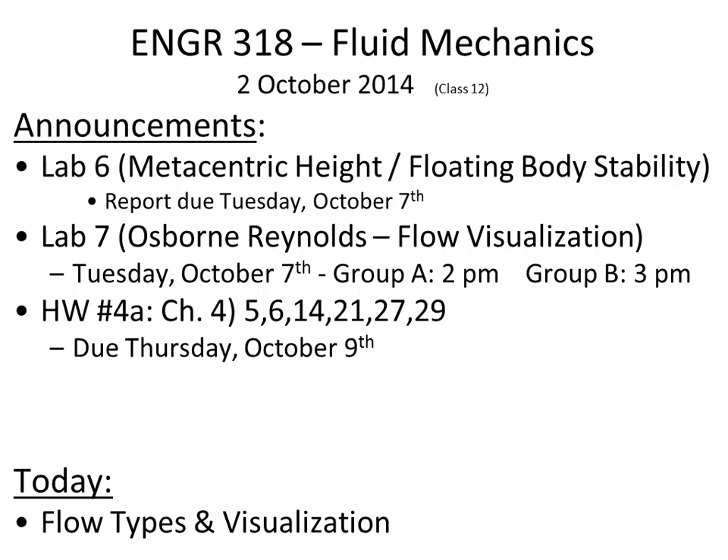So we're talking about Chapter 4 stuff, and this is big news because previously we've only been doing fluid properties and hydrostatics. Finally, we get to start talking about the fluids moving. And so why does fluid motion matter? Why are we excited to start thinking about particles moving in the fluid? Yeah, it's the real deal of civil engineering.

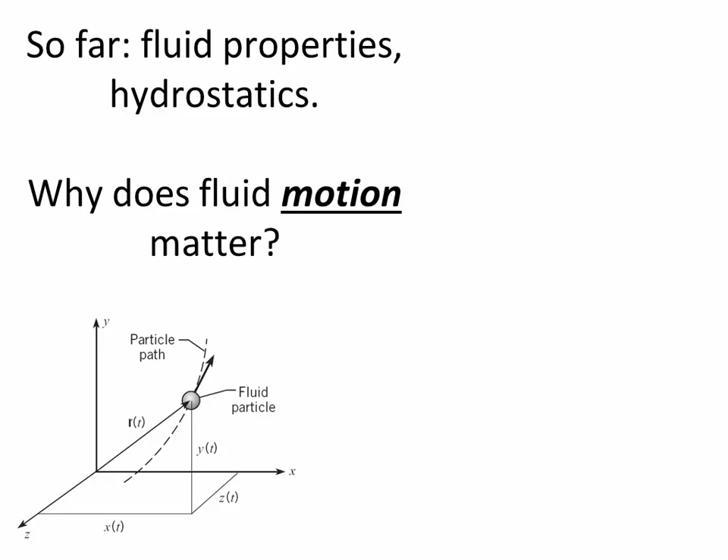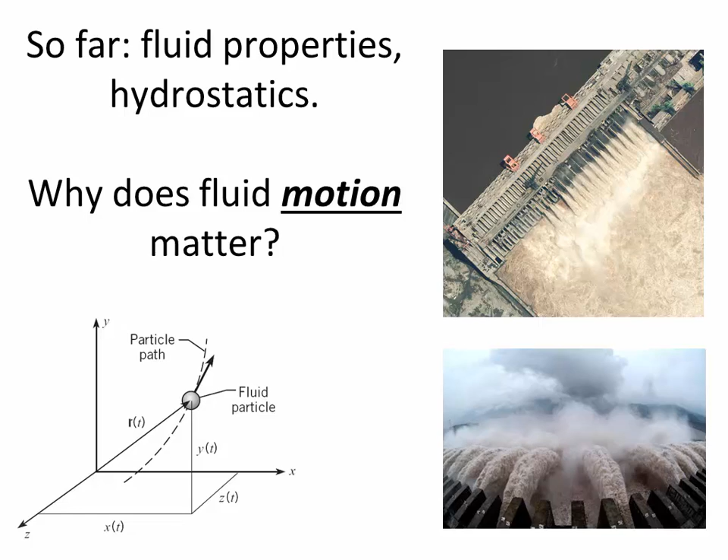In civil engineering, sometimes we have static fluids, and so the water on the left side of this dam can be approximated as static, but what happens inside the dam, the forces of the fluid as they move through a turbine, the amount of energy that's exerted on the bottom of the stream channel as those jets of water impact the channel. The majority of the water out there is moving somewhere, whether it's in the subsurface or over the surface.

So there are two different approaches for trying to break fluid motion up into pieces and try and understand what's the velocity of the fluid, trying to track where it's going over time. The Lagrangian approach answers the question of what is the fluid velocity by using a frame of reference that tracks individual particles. So it has a certain field of analysis. We're looking at the particles that are in this box. And the Lagrangian approach says, let's look at each individual particle.

It looks at each particle, and it tracks that individual particle over time. The path that's traced by each particle is called a path line. We're also going to talk about streak lines and streamlines today, and we'll have an activity for drawing path lines. But the Lagrangian approach has a limitation: it's really hard to keep track of all the particles in a flow field because there's going to be a lot of them. If you're going to do it at the molecular level, it's hard to track every particle.

And so instead of following every particle, what you'll sometimes do when employing the Lagrangian approach is use this particle to represent the particles that are around it. So this one is going to sort of be the approximation. It's a little bit like a poll ahead of an election. One person approximates the behavior of lots of others.

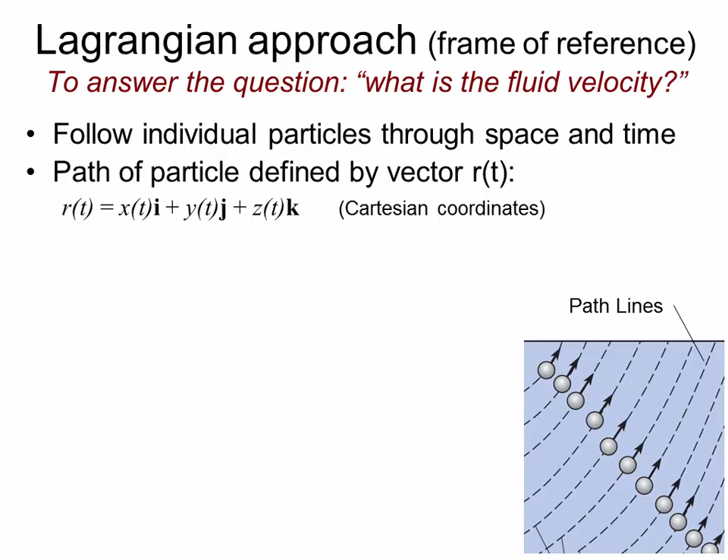And so this one particle is used to approximate those in the surrounding areas. So in the Lagrangian approach, the coordinates, the location of each particle is tracked over time. And so in this approach, the velocity of a particle over time is going to be broken up into its x, y, and z components.

And so when we're talking in 3 dimensions, we don't have to just think about the vertical and the horizontal, but now also there's a 3rd dimension into the page. And so we can have an i, j, and k, and each of those are 3-dimensional coordinates where we have a velocity in the x, y, and z. So u, v, and w, we're just talking about the magnitude of the velocity along a certain axis over time.

So there's the Lagrangian approach, and the other approach to determining how the fluid is moving is the Eulerian approach. And instead of tracking individual particles, the Eulerian approach says, let's break our field of area, this big box, into smaller pieces. And then what we'll do with this mesh of pieces is we will say that the velocity inside of this window is a certain direction. And so we'll assign every particle inside of this window a certain velocity at a certain time.

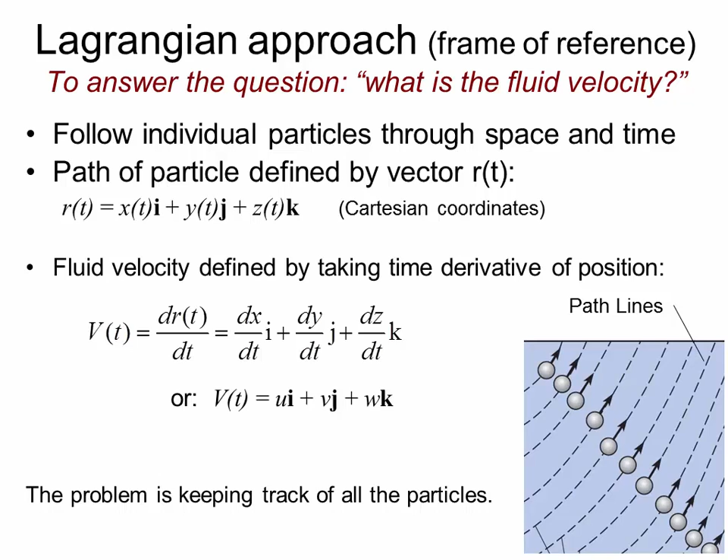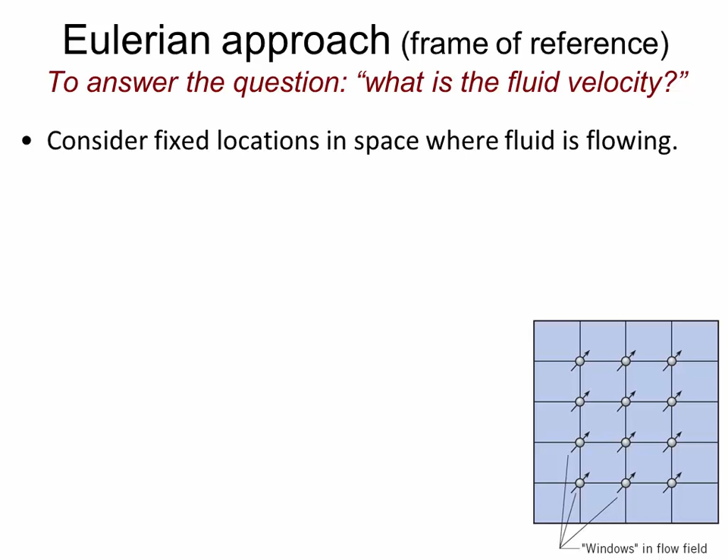And so it's not tracking a particle that's moving over time, because in this first approach, inside of our window, the particle is moving in the window. In the Eulerian approach, our window is stationary, but what we're doing over time is we're assigning behavior to the stationary window. And so we're going to be saying, what is the velocity in 3 dimensions? What's the x, y, and z velocity of this at a certain time? So at time t, each window has a velocity in 3 dimensions.

And so we'll look at different ways of applying both of these methods. But the important thing is to note that you can't track every particle, and so there have to be simplifications in order to approximate the behavior of the entire flow field.

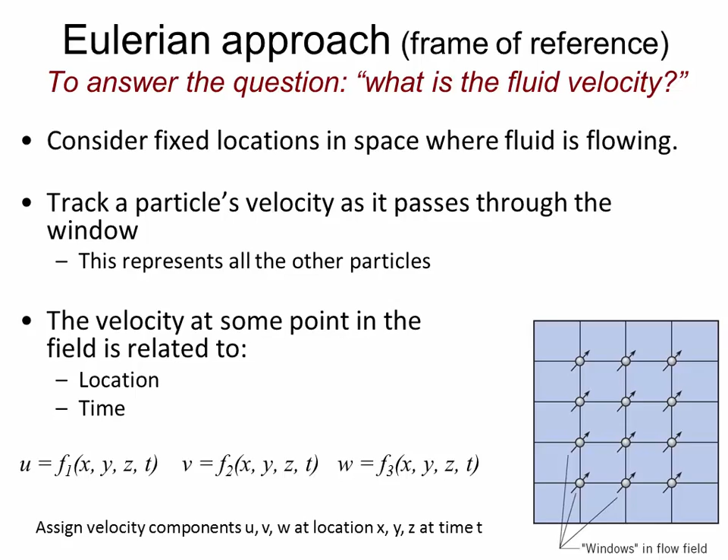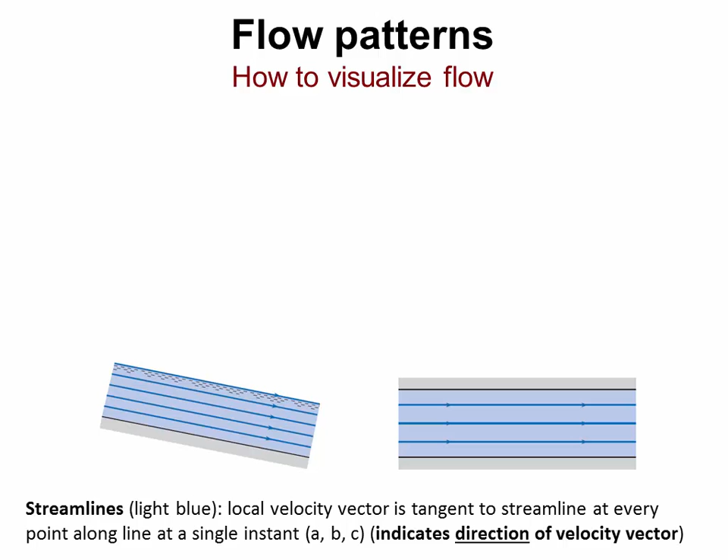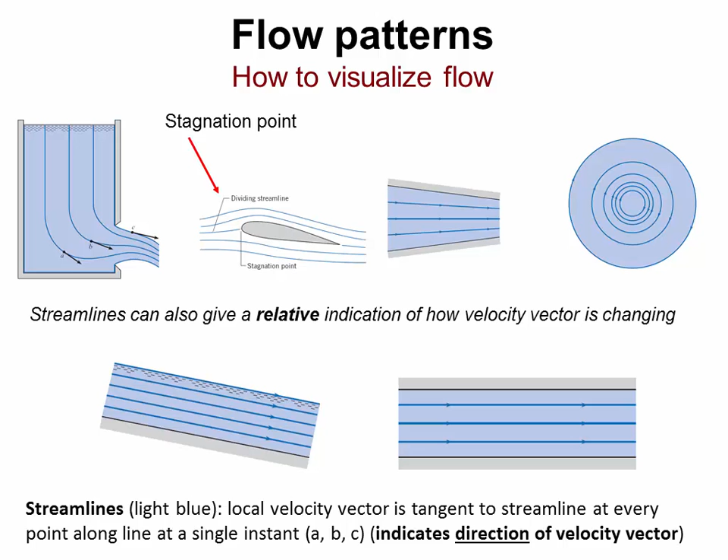And then on the far right figure here, it's showing rotational flow. Again, it's non-uniform because the direction of the velocity keeps changing. Even if the magnitude or the speed is the same, as the water flows around in a circle like a vortex, whether it's a hurricane or like a sinkhole that's draining water, if it swirls around in circles, the direction of the velocity changes, and so that is the definition of non-uniform flow.

So here we're talking about non-uniform and uniform flow. The definition of uniform flow is when the velocity is constant in the direction of the streamline. That means with respect to position, the velocity isn't changing. The velocity is the same on the left side of the flow field as it is on the right side of the flow field. As the flow moves in the direction of flow, it's not speeding up, slowing down, or changing direction. Everything's uniform in an open channel and a closed channel.

The change in velocity with respect to position, here S is referring to position. So the change in velocity with respect to changing position, dV/ds, is 0. There's no change in velocity as the position varies. Now, non-uniform flow is when the velocity is changing. And here are those diagrams showing non-uniform flow. Here the velocity is increasing as we go in the direction of flow. So dV/ds is not 0. In fact, in this case, it's going up. Here it is just the direction component of the velocity that varies rather than the magnitude.

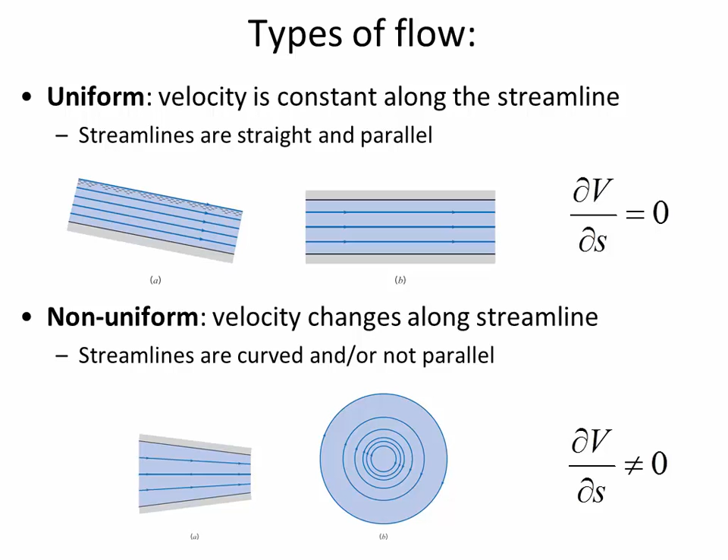So the first of many different ways we classify flow is uniform or non-uniform, velocity as a function of position. The next way that we're going to divide flow up when we try and classify it is into how the flow changes over time, not necessarily position. Uniform, non-uniform is all about position. Steady, unsteady is about how flow conditions change over time.

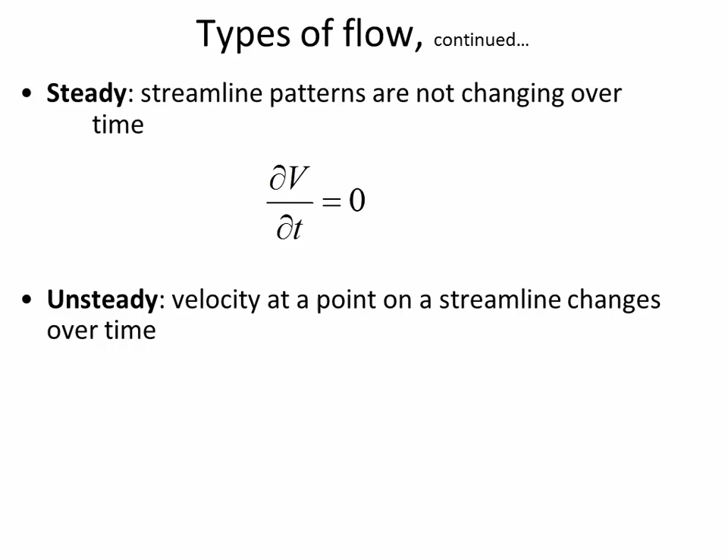I see flow right now. What is the flow going to be like in 5 minutes? Is it going to be the same as it is now for the location that I'm looking at? Or is the flow in 5 minutes going to be different? And if it's constant over time, if there's no change over time, we call that steady flow. And if it is varying over time, we call it unsteady flow.

Now, I don't have any pictures shown on the screen right now. I had pictures to show you when it was uniform versus non-uniform. How come I can't show you a single image that differentiates between steady and unsteady? Because a picture is just at a single instant in time, and the whole essence of steady versus unsteady flow is what's happening over a period, from one time to the next. And so a single image doesn't give us any information about whether flow is steady or unsteady.

And so we have to use a video or a sequence of images in order to illustrate the difference between steady and unsteady flow. And I've got a video to show you that illustrates what unsteady flow looks like.

Really excellent illustration of what to look for. That's crazy. It hasn't even been raining. The conditions at one time are not equal to the conditions at another. That is so deep. It's also a good illustration. It seems like it's not raining there. It's raining somewhere. I hope those people have enough sense to get out of the way.

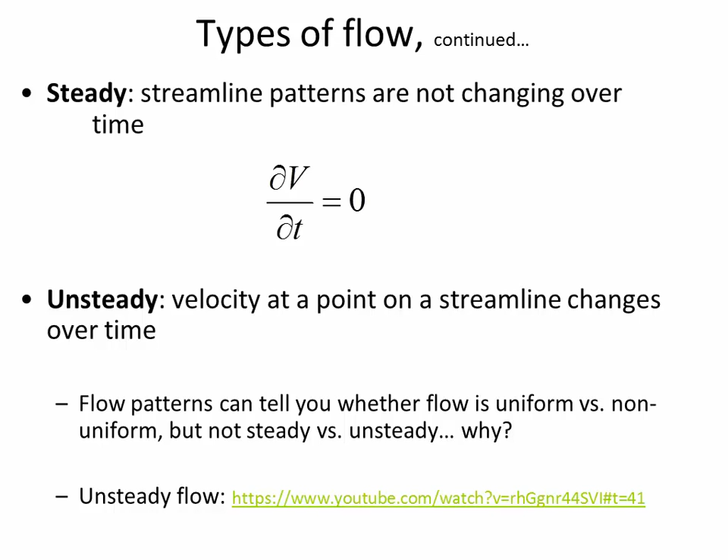So flow can be uniform versus non-uniform, steady versus unsteady. Those are talking about two separate different things: flow as a function of position and flow as a function of time. Other ways to classify flow is by laminar versus turbulent.

And laminar flow is a very smooth, slow-moving water, and the way that we calculate the Reynolds number, which classifies whether flow is laminar: if the Reynolds number is less than 2,000, then we know the flow is laminar. That is a function of the density of the fluid, the velocity at which it moves. If it's inside of an enclosed pipe, then we would account for the diameter of the pipe, and then finally all of that is divided by the viscosity of the fluid.

Reynolds number is a unitless property, so all of these three things in the numerator multiplied together will have the same units of newton seconds per meter squared that viscosity has. And so when we divide the numerator and the denominator, there's no units remaining. So laminar flow is very smooth, and it's characteristic of very little energy being lost when conditions are laminar. And the flow doesn't spread out as much.

Remember the diffusion that we saw in the first image of the smoke going over the top of the car? Those smoke streamlines will spread out less in laminar flow than they will in turbulent flow. Next Tuesday, we're actually going to have a chance to visually see laminar versus turbulent flow in the lab.

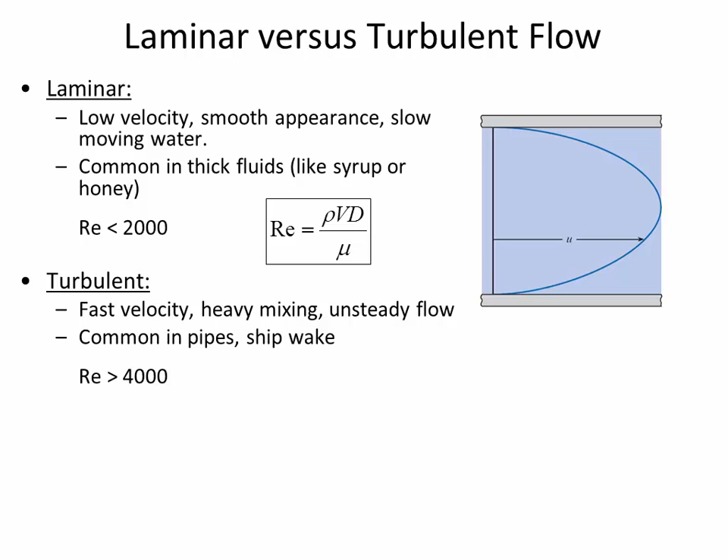Now, turbulent flow is when this property called the Reynolds number is greater than 4,000. And it's typical for water moving at a high velocity through a pipe network, or a ship wake or the wind that comes behind a truck on the road. It's like lots of turbulence, and so a Reynolds number of greater than 4,000, but then there's this transition range in between, where between 2,000 and 4,000 we don't know exactly whether it will be laminar or turbulent.

It could be one or the other depending on what direction you're coming from. And by that I mean if you had a pipe and the water is moving through it very slowly, if conditions are laminar to begin with, and you're gradually increasing the flow velocity just a little bit, then in this uncertain intermediate range between 2,000 and 4,000, it will stay laminar for a long time until there's some disturbance that will then force it into the turbulent regime. So if you bang on the pipe with a hammer, then suddenly it might transition into turbulent flow.

Likewise, if the water velocity is very high moving through the pipe and you're gradually decreasing the velocity so that the Reynolds number is going down and down, it will stay turbulent until it reaches about 2,000, and then it switches into the laminar range. So we have an example here. I'd like you to get a crack at this unitless property of Reynolds number.

We have a pipe that's 2.5 meters in diameter, and the velocity moving through the pipe is 0.1 meters per second. What is the Reynolds number under those circumstances? And then part B is asking what's the maximum flow velocity that you can have and still the Reynolds number will be equal to 2,000. Or in other words, that you can guarantee the flow will be laminar.

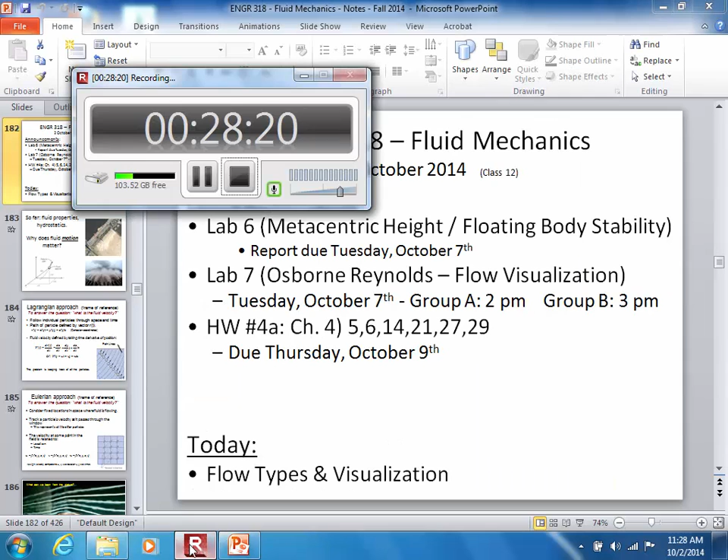It'll be laminar. Yeah, I should change that to Reynolds number is less than or equal to 2,000. But they call it transition. The flow will be laminar or turbulent, but the zone between 2,000 and 4,000 is indeterminate. It depends on the flow conditions prior to what you're seeing. How did it get to 3,000? Did it get there because it was fast and now it's slow, or did it get there because it was really slow and now it's relatively slow?

So I did it as the velocity times the diameter divided by the kinematic viscosity. So it was 0.1 meters per second, 2.5 meters, the diameter of the pipe, and then 1 times 10 to the minus sixth meters squared per second. So even though it's moving really slow, 0.1 meters per second is pretty slow moving water, it's still considered turbulent flow.

So when we're in the lab next Tuesday, we're going to be looking at water flowing through a little pipe, a tube. And we're going to inject a dye into the center of that pipe so that we can watch the dye and see if it gets scrambled or if it stays in a straight line. And it's going to have to be moving super slow to not get scrambled up, because here 0.1 meter per second is hardly moving at all, and it's still turbulent.

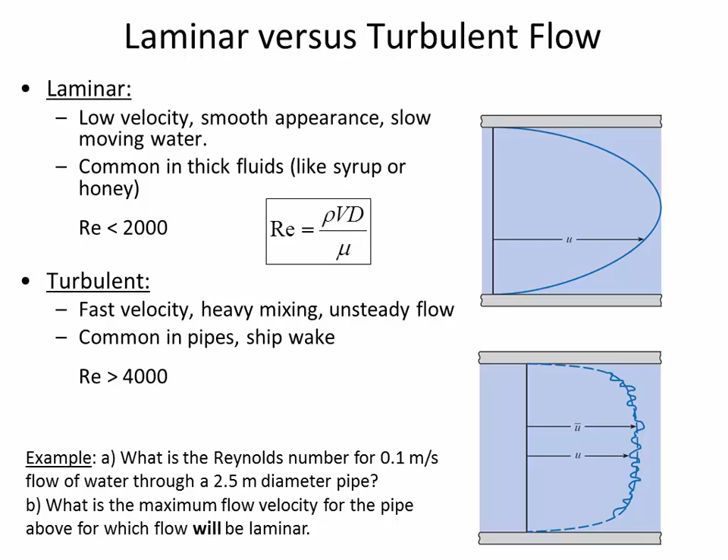So what we've talked about so far is uniform versus non-uniform, steady versus unsteady, and laminar versus turbulent. So we're breaking the flow up into lots of different flow types to be able to describe what's happening to it and how that affects the forces that we see and the behavior of the fluid. Here is a comparison. There's uniform versus non-uniform, steady versus unsteady. So what is it talking about? When we're trying to classify whether flow is uniform or non-uniform, the key thing here is position. Change in velocity with respect to position. Whereas in the classification of steady versus unsteady, it's change in velocity with respect to time.

Now this slide that I'm showing you right now is pretty empty. Later on, through the rest of Chapter 4, I'm going to fill up this slide because we're going to have certain equations that deal with uniform flow versus non-uniform flow, some kind of equations that deal with steady versus unsteady, and we'll be able to actually break up all of these coming concepts into the main questions that they resolve: how does the velocity or the pressure change because of some force that's being applied to the fluid. And so this is the reason why there's so much dead white space down here, is that you'll see this same slide but with more information in future lectures as we flesh out all these concepts that are related.

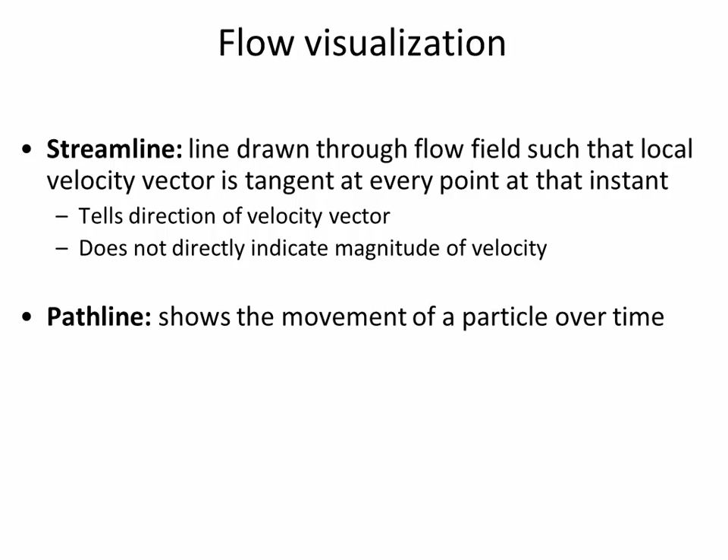So that first picture that we saw of the fancy car in the wind tunnel, that was an illustration of flow visualization, and streamlines are a way of observing not the absolute magnitude of the velocity but the relative velocity, and it tells us the direction of the velocity vector but not the magnitude. A path line, remember when we were looking at the Lagrangian approach to identifying the velocity, the Lagrangian approach was look at a single particle and follow where it goes. And that's what a path line is: it shows the movement of a particle over time.

A streak line is similar but a little bit more complicated. What a streak line is: if you started injecting dye into a fluid or some sort of a tracer, and then the fluid is moving around, then the location of that tracer or dye tells you the history of where the flow was. And let me illustrate that with just a little drawing I'm going to put on the board here of a river, and let's just for sake of argument say it's the Ohio River, and then there's the bridge that goes over the river. Okay, so here's the river and then here's the bridge.

The water's moving this way. Okay. If I'm walking across the bridge and I throw in a, well, let's not make it too gruesome. If I throw in a can, I was going to throw in a body, but all right. So I throw in a can, then the can just floats down the river, and the path line, you know, if the water's just moving straight like this, then the path line, here's the can right now, here's the can in 1 minute, here's the can in 2 minutes, here's the can in 3 minutes.

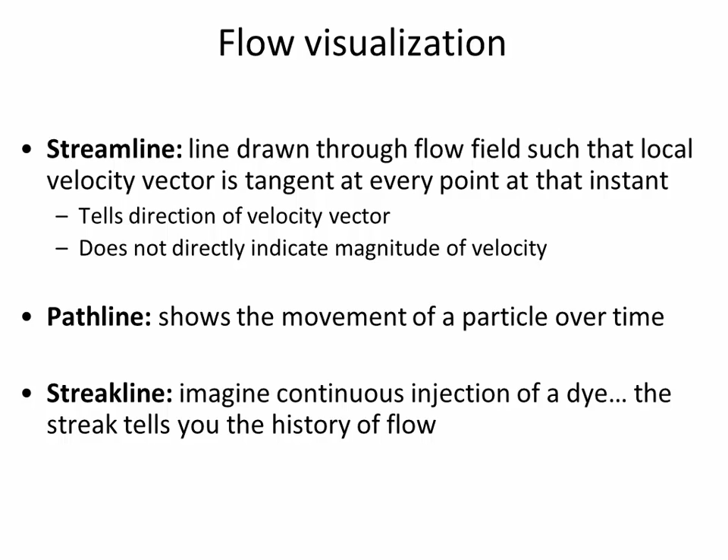It's showing the streak of not only the movement of the fluid, but it's also showing my movement, because the fluid is just moving to the side. The reason why this is at an angle is because I was waddling across the bridge as I carried that big bucket of paint that I was pouring in. All right? So streamlines, path lines, streak lines, all three of these are used to help us visualize flow.

So here's an illustration that's in the textbook that tries to show you streak lines, streamlines, and path lines. And before I show you this illustration from the book, I have to just lay the groundwork, because the picture, when you look at it, there's so much stuff drawn on top of itself that you can't really interpret it unless you spend a lot of time staring at it. So here's the scenario that's going to be illustrated in the following figure.

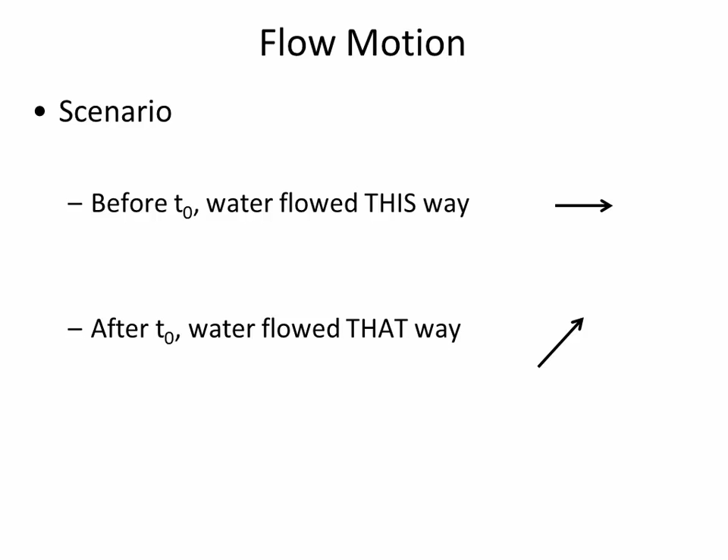Before some certain time that we're going to call T0, that's like the dividing point. There's before T0 and then there's after T0. It is the event that divides time. Before that, the flow was going to the right, and then after that, the flow was going at an angle. So there's only two periods. There's before and after, and the flow is going two different directions during those periods. And so here's the illustration.

Here it's showing these blue lines, the ones that are horizontal, that are pointing to the side, are the streamlines for before T0. So T is less than T0. That means it's the streamline before this dividing event. And then after T0, the streamlines are going at the angle.

Okay, so these two figures here are showing path lines. And so here is a tracer of some sort. It's a single object that's been dropped into the fluid. It's a can, whatever. It's floating, and it floated to the right, and then when the flow changed directions, now the can is traveling at that angle.

And so path lines are easy to draw. But what's a little bit more tricky to draw is the streak lines. And sometimes we get tempted into thinking, well, streak lines are just the inverse of a path line or something like that. But that's not true at all.

It's just coincidental in this figure that it looks like a mirror image of some sort. I'll give you a handout in a minute that disproves that idea. But what a streak line is, remember when I was walking across the river and pouring in the paint, in the streak line, we're pouring in our tracer at the same location through the entire two time periods. And this is the first drop of paint that we poured in. It's been pushed all the way over here.

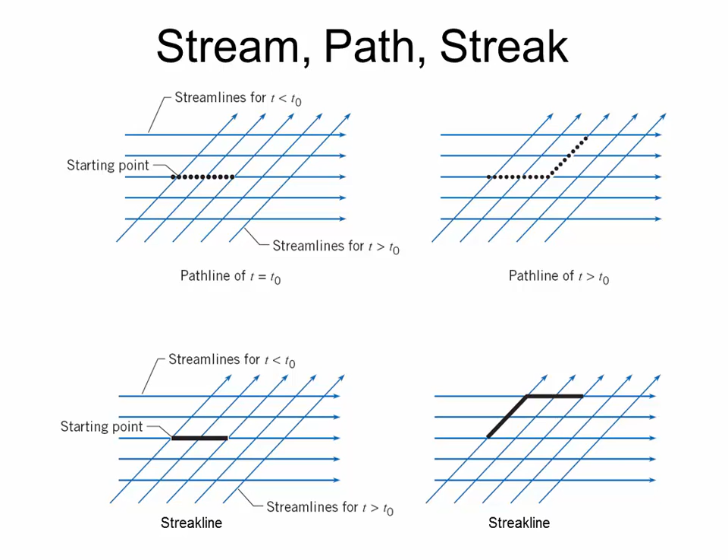Here's the paint from the beginning, and here is where I'm still pouring in the paint at the very end. So you can see the shape that it made by the changing direction of the flow. So here's an example. Let me hand it out now so you can get practice drawing these. Use pencil. Don't start with pen. Don't get too confident because these are tricky, especially the streak line.

Now, I don't need to collect these. I know I collect a lot of the in-class exercises, but this one is just for you. It's not for me. But I still would encourage you to work with a partner on attempting this. So there's 3 different time periods in this one. Oh no, wait, this is a separate example. Okay, we'll do this handout in a minute. Let me show you the one that's on the screen here, and then you can go to the handout.

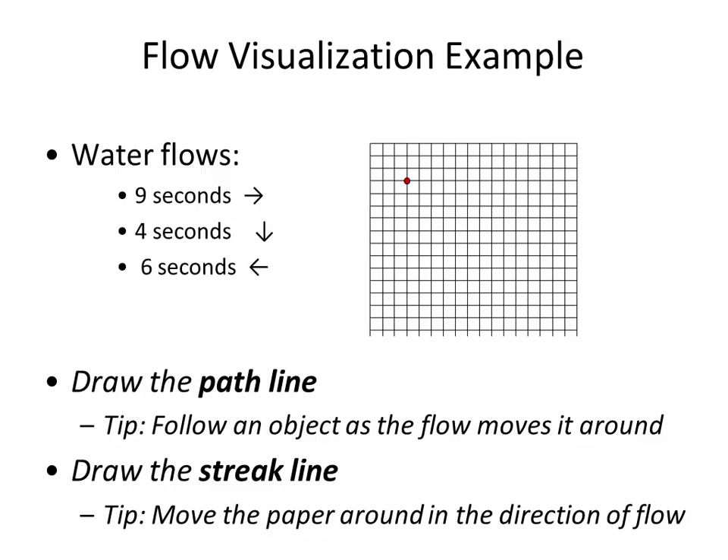Right, right. So when it's going at an angle, the block path is longer than it would be if it's just one of the top or the side lengths. Okay, so I'll stop talking, let you collaborate, and do your best to draw the path line and the streak line for that example in the handout.

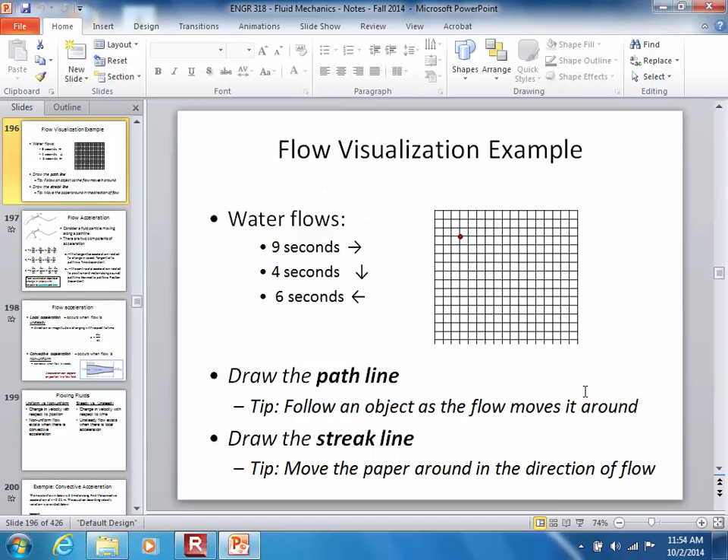We've been talking about velocity. And no discussion of velocity is complete without a discussion of acceleration. It's where velocity comes from, if you think about it. Fluid velocity from acceleration, there's different types of acceleration that we're going to be talking about this semester. The type of acceleration that most people think of when they are coming from a background of physics is usually something that we call local acceleration.

But velocity can change as a function of time, or it can change as a function of position. And so you think about the particle that's moving along some curved path. And the two components of acceleration here are the acceleration that's tangential to its direction and normal to its current direction.

The tangential acceleration is related to a change in speed, or the change in magnitude of its velocity. And if we have a change in its direction, then that's a centripetal acceleration that's normal to the path line. So if you're in a car and you're driving around in circles, you're going to feel an acceleration even if the speed stays the same. If you're still going 30 miles an hour as you drive in a circle, you're pushed to the side of your vehicle because of centripetal acceleration.

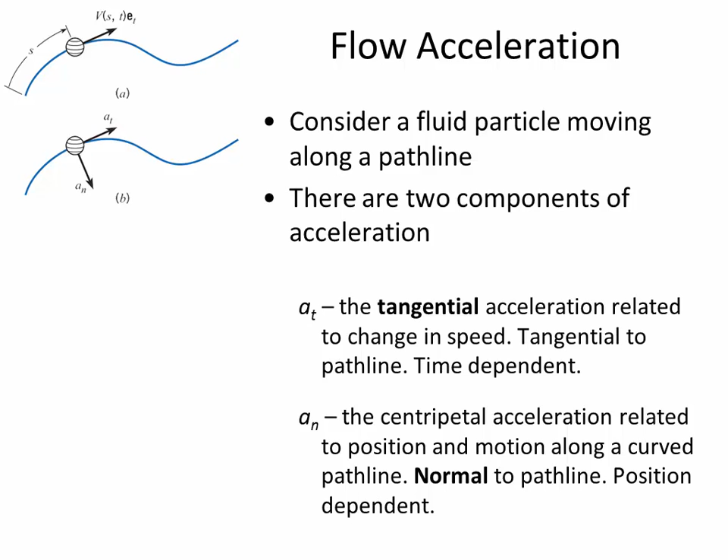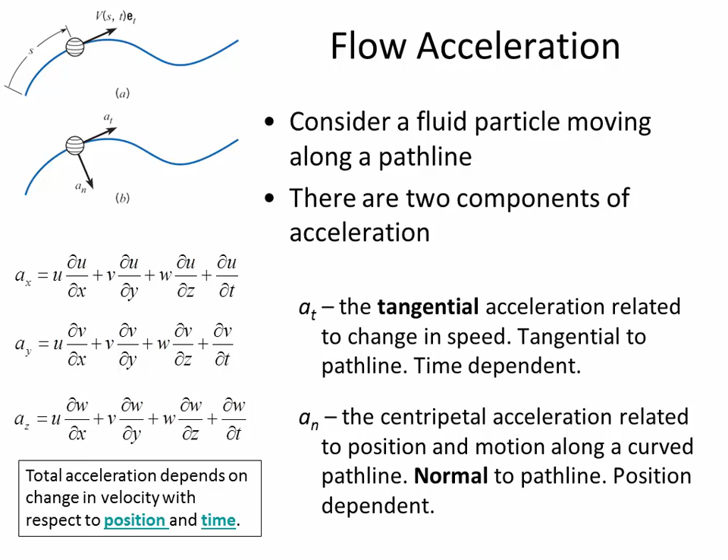But then if you're speeding up or slowing down in a car, that extra acceleration that you feel, that's the tangential acceleration. And the total acceleration depends on change of velocity with respect to position and time. And so you can have both of these accelerations simultaneously. If you're in a car and you're speeding up as you're also going in a curve, you're experiencing both the centripetal and tangential acceleration at the same time.

So if we go back to our discussion of steady versus unsteady flow, local acceleration is what causes unsteady flow. It's when the velocity is changing with respect to time. And so du/dt is what we call local acceleration. And so the velocity increases over time. That's local acceleration.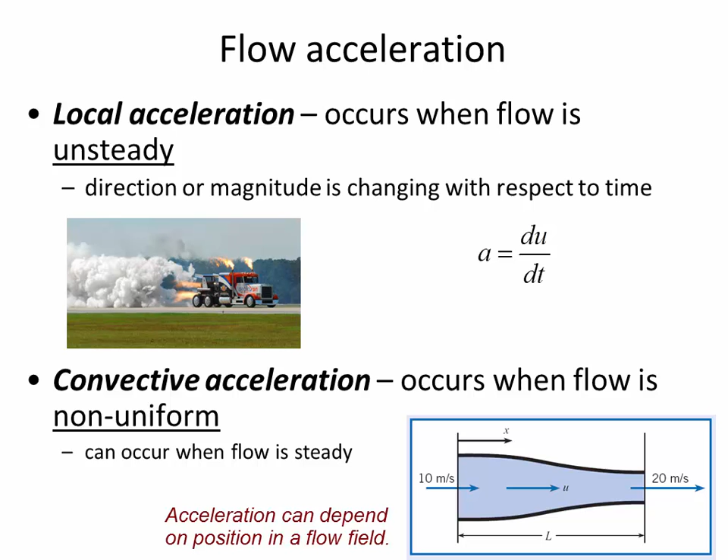Anytime there's a change in velocity, there's been an acceleration to cause it. But the kind of acceleration that got caused here has nothing to do with a change in conditions over time, because this is in steady state. It comes in at 10 meters per second, goes out at 20, and it stays that way. Now, 5 minutes from now, an hour from now, conditions are steady, but they're non-uniform. So non-uniform flow, remember, is when the velocity changes with respect to position. So if I'm filling in this table again of classifying flow, non-uniform flow is caused by convective acceleration. Unsteady flow is caused by local acceleration.

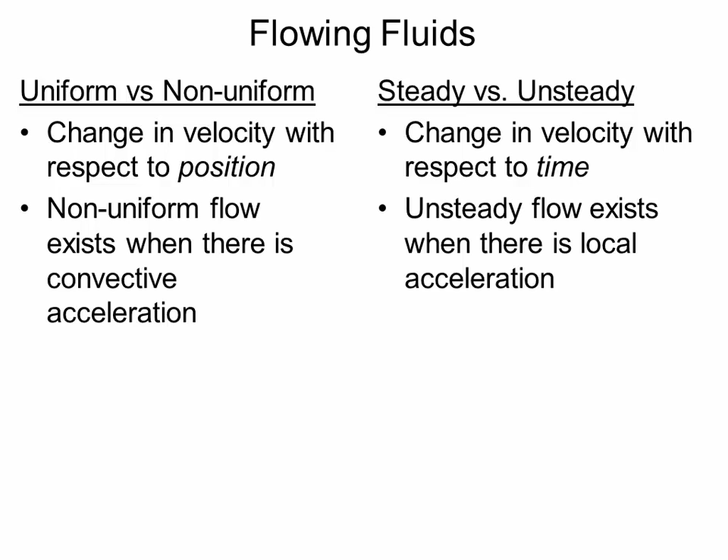So here's an example, and it's one of the few times in the classes that I teach that we'll actually dust off our calculus skills a little bit. Oh yeah, here we go. Don't want to lose this.